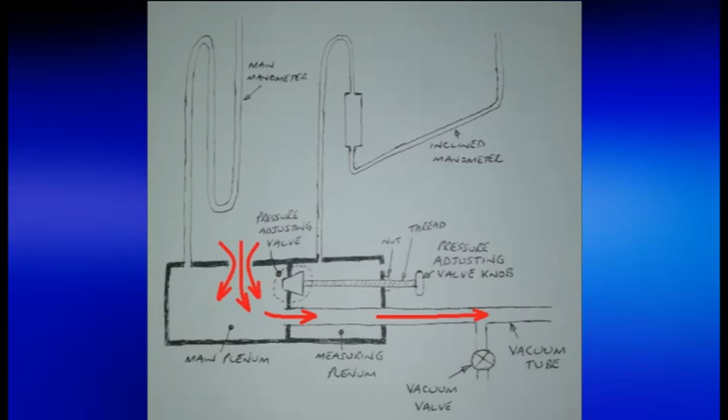A flow bench is used to measure the flow rate of air through an object, such as a filter or a cylinder head. It can be used to compare similar items to tell us which flows better, i.e., which one has the least drag. We need to create a known pressure difference across an orifice, which is another name for a hole. The pressure difference that is most commonly used is 28 inches of water, or 1 psi.

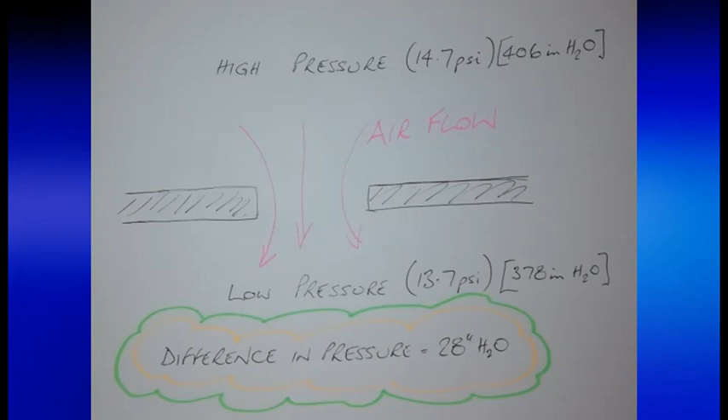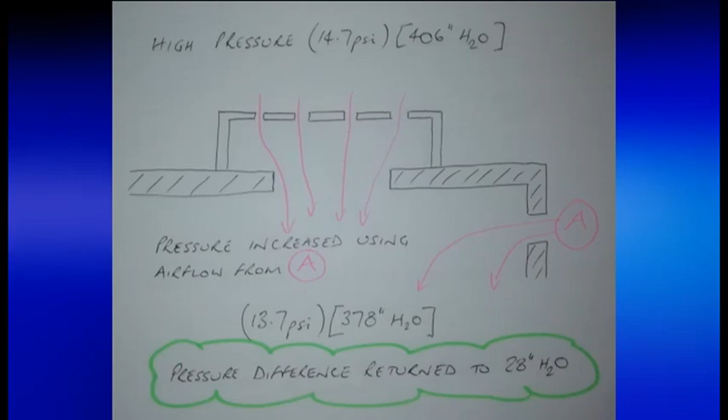After adding the test piece, the pressure difference across the combined test piece and orifice will be more than it was with just the orifice. We need to allow air to be drawn in under the orifice to return the pressure difference back to its original value. It is the flow rate of this new air that is what we want to measure, and this is the flow bench that I built to do it.

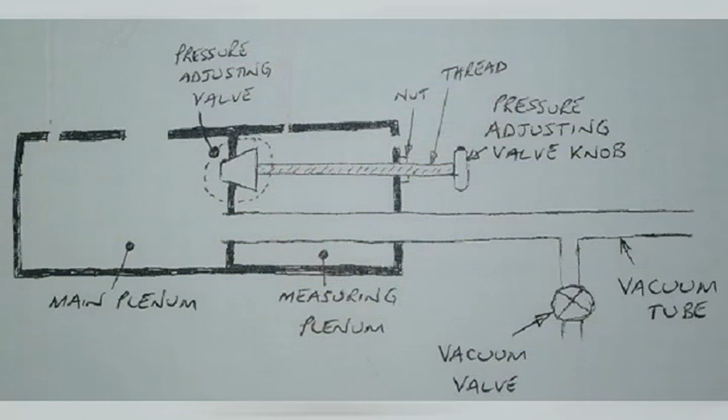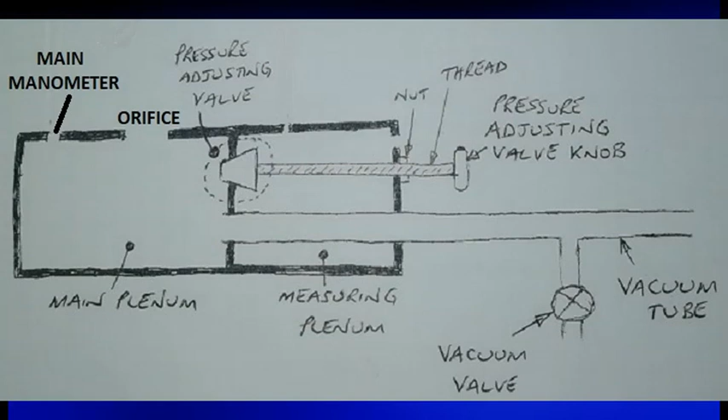It looks complicated, so let's break it down into its component parts. We'll start with the flow box and deal with the manometer later. The flow box consists of two sections, the main plenum and the measuring plenum. When the main manometer and the orifice are sealed and the adjusting valve is closed, the main plenum must be completely airtight when the vacuum is applied. Any leakage will render our results meaningless.

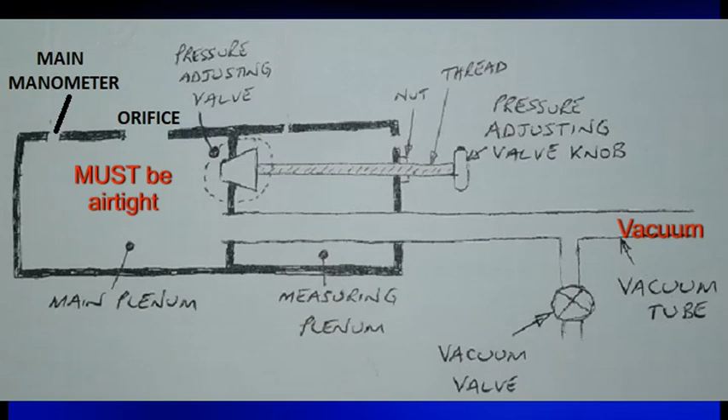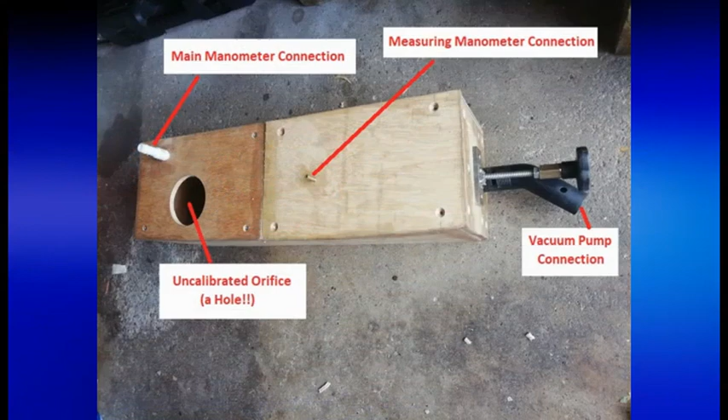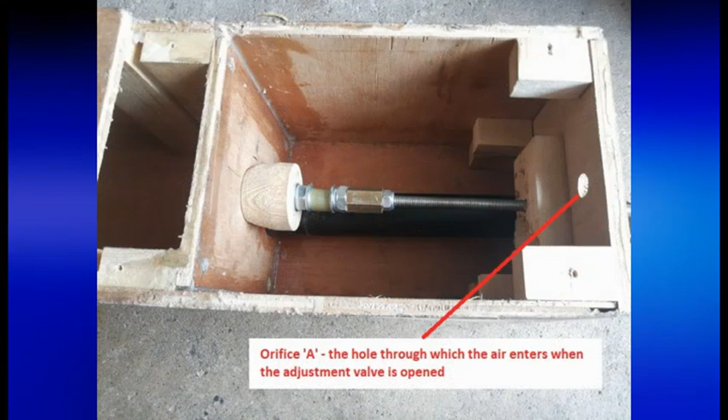The measuring plenum is used to control the airflow under the test piece and orifice to return the pressure difference to its original value. Here is the actual flow box that I made. This is the inside of the measuring plenum showing the adjusting valve. And here is the hole that allows air to enter the measuring plenum when the adjusting valve is opened.

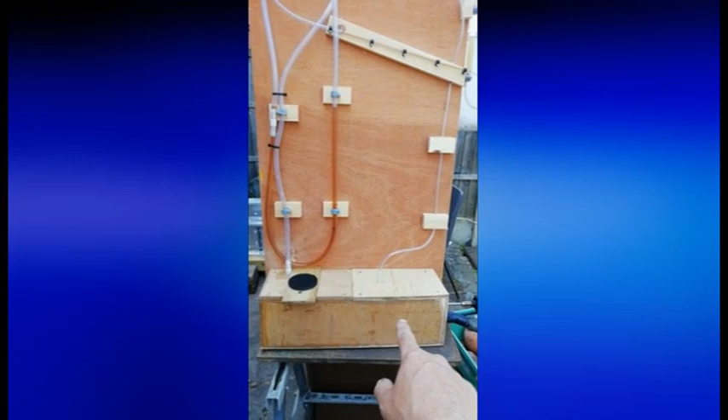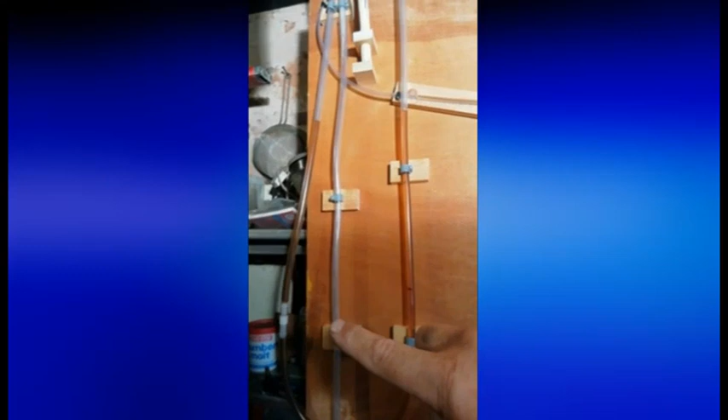This is the flow bench that I made. Here's the flow box that I explained earlier. The black thing over the orifice is a test piece. This is the manometer setup. This is the main manometer and it comes out of the main plenum. You may notice the extension. This is to prevent fluid being sucked into the plenum.

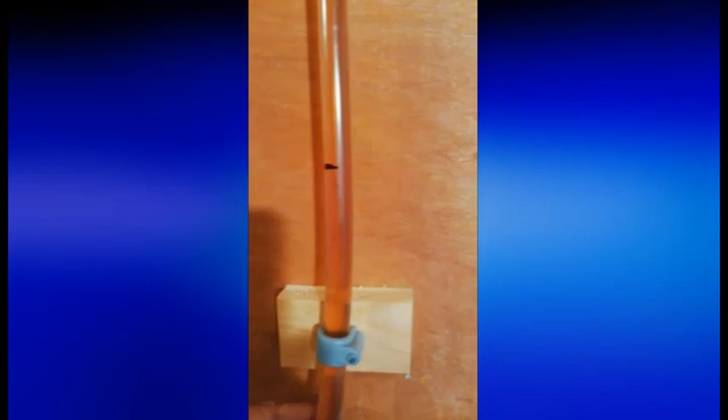The fluid is distilled water, some vinegar to prevent carbonates, and some food colouring. The tube is open to atmosphere. It is marked with a 0 mark and with a mark 14 inches below it. The tube between these two marks must be vertical. And so must the other side of the loop above the 0 line.

This is the measuring manometer, sometimes referred to as the inclined manometer. There's a fluid reservoir. It should have a large bore compared to the tube, so the rise in its level is negligible compared to the drop in the tube. The measuring tube is inclined because the drop to be measured is so small as to be almost invisible if the tube were vertical.

Again, the tube is open to atmosphere. The angle of inclination should be determined by experimentation, but is approximately 5 degrees. These markings are in centimeters, but they are just numbers to compare results. We can zero the reading by moving the tube as shown. It's important to know this is not a calibrated flow bench, so its results can't be compared against anybody else's.

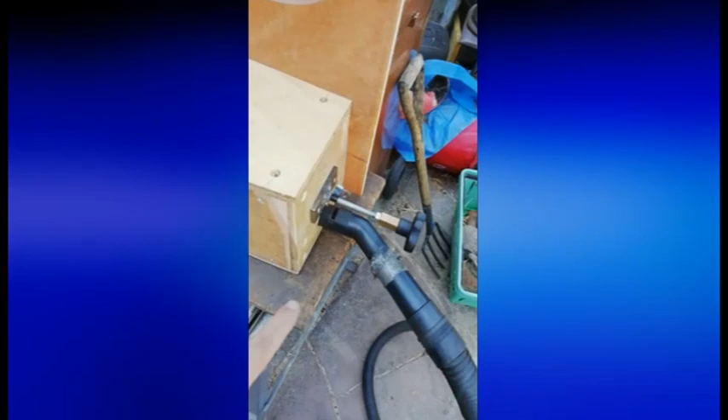Before we start, we need to make sure that the orifice plate is properly sealed to the main plenum. The main manometer is zeroed. The inclined manometer is zeroed. The adjusting valve is fully closed and the vacuum valve is fully open. At last we can actually use the flow bench.

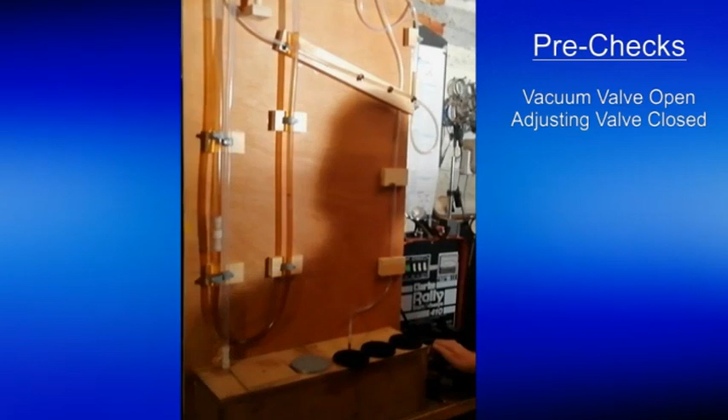First, the pre-flight checks. 1. Vacuum valve open. 2. Adjustment valve fully closed. 3. Orifice plate selected. 4. Orifice plate fully sealed. 5. Main manometer zeroed. 6. Inclined manometer zeroed.

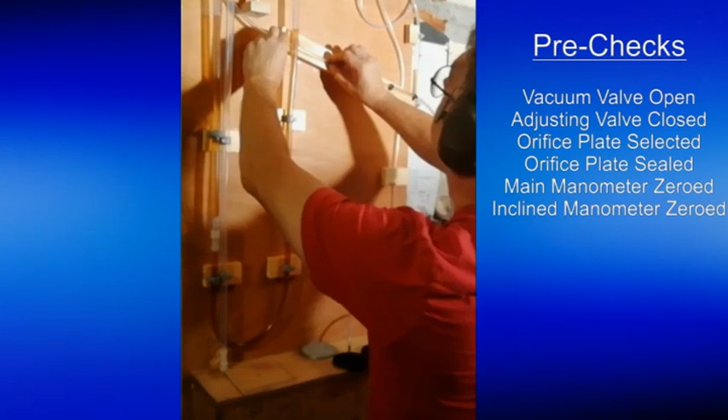It's time to switch on the vacuum pump and set the main manometer to a height difference of 28 inches of water or 1 psi. The flow bench is now ready for its first test piece. The first test piece is a copy of a mass airflow screen that I made. You can see how the fluid level has dropped in the main manometer after I placed the screen over the orifice plate.

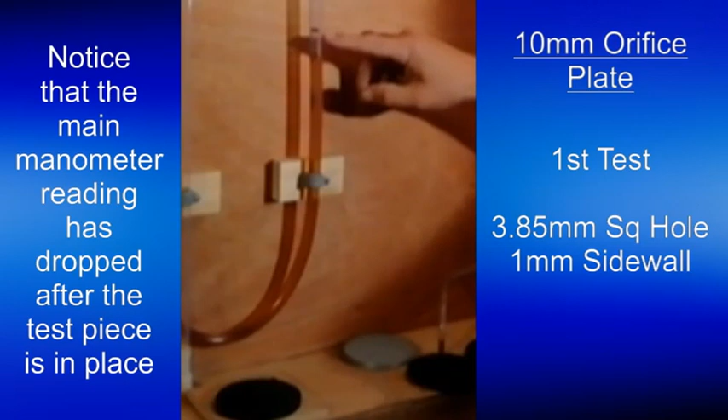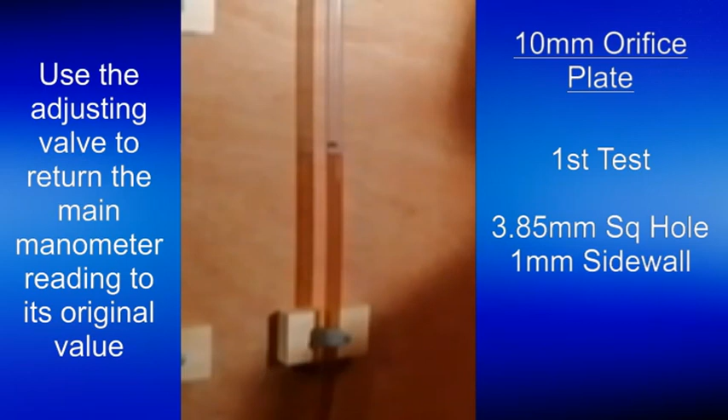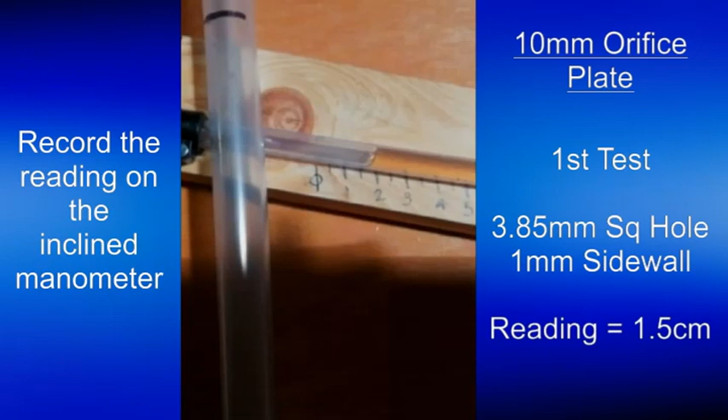I used the adjusting valve to return the main manometer reading to its original setting of 28 inches. We need to record the orifice plate size and the inclined manometer reading on each test piece. In this case, it's 1.5 centimeters using a 10mm orifice plate. The second test piece was this hexagon screen, and the reading was 1.0 centimeters, again using the 10mm orifice plate. Comparing the two results, we can say that the hexagon screen created less drag and produced the better results.